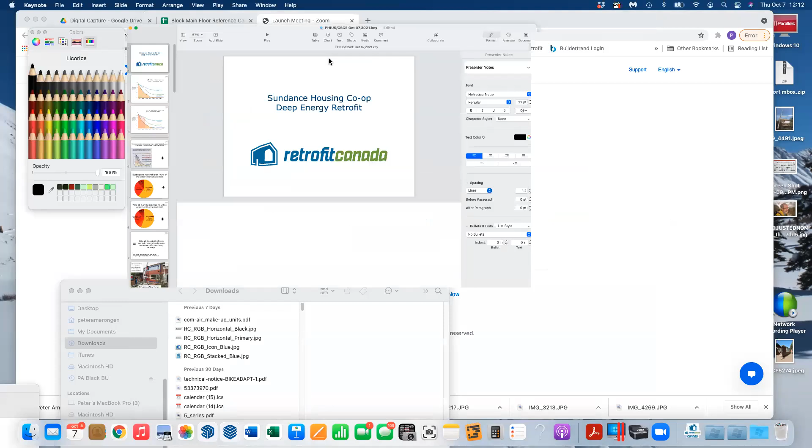And with that, I will pass it over to Peter. Is that okay? Can you see that? Yep, I see it. Thanks very much, Frank.

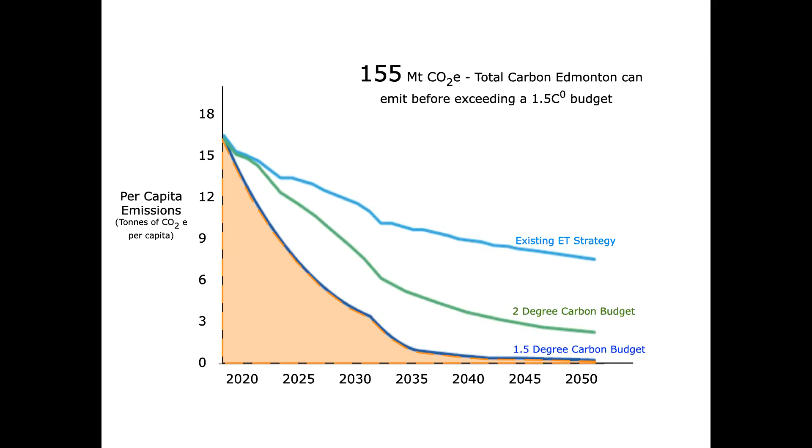Before we get into the presentation itself, I'd like to quickly go through the context. As Frank mentioned, I'm on the city's Energy Transition Advisory Committee. This slide shows the kind of cuts we need to make to keep Edmonton within a 1.5 degree scenario budget. At the rate we're going, we'll blow through that in the next 8 years.

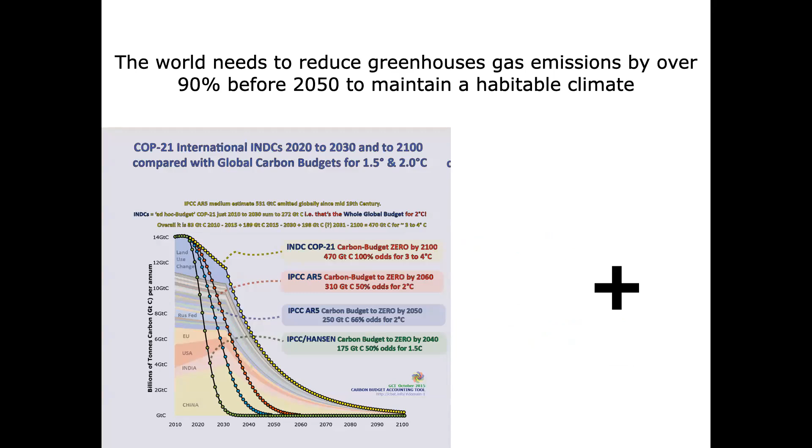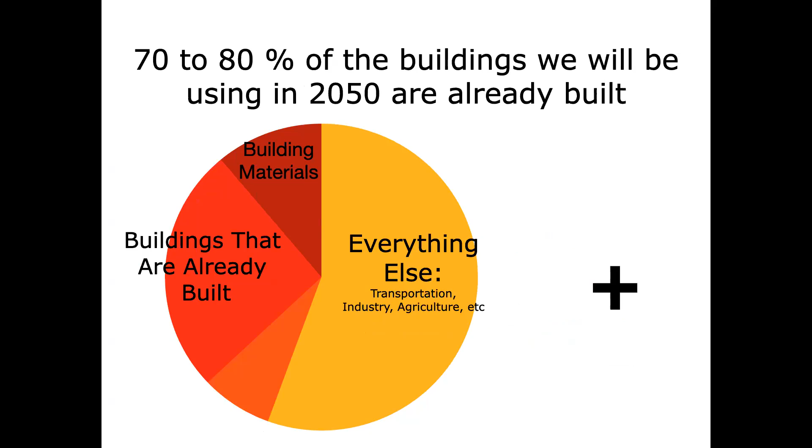And Edmonton is not atypical—we're seeing graphs like this all over the world. Buildings are responsible for about 40% of total GHGs, and 70 to 80% of the buildings we'll be using in 2050 are already built. So there's really no path to a stable climate without industrial scale deep energy retrofits to existing buildings.

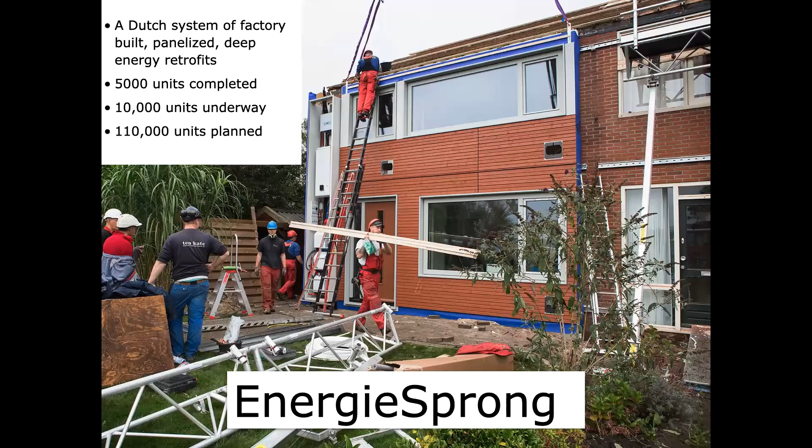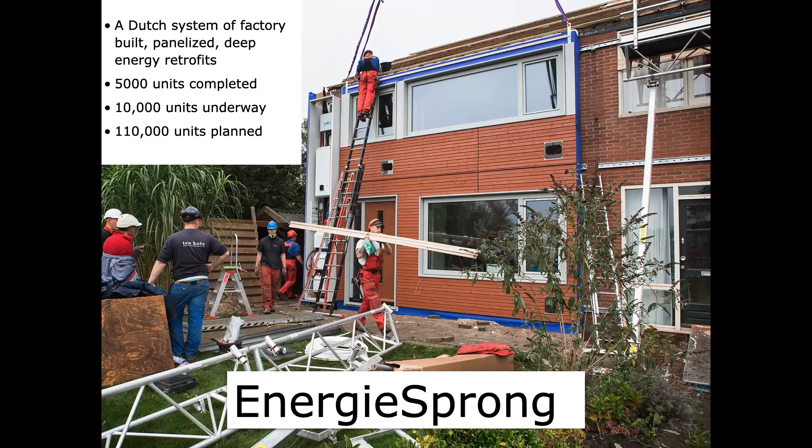The Dutch have an interesting start on tackling this problem. They've developed a system called EnergieSprong, where they scan existing buildings and make panels in a factory, bring them out, and within a month or so transform existing 1950s post-war buildings into net zero energy buildings. They've done about 5,000, have about 10,000 in the works right now, and they have 110,000 planned.

The Sundance Co-op was built in the 1970s. They were on the verge of renewing their mortgage and their lease, and they realized this would probably be the only chance they'd get to upgrade these buildings for the long haul. They're interested in the next 50, 100 years—it's a very stable community, and they're interested in leaving these buildings in good shape for posterity in every respect.

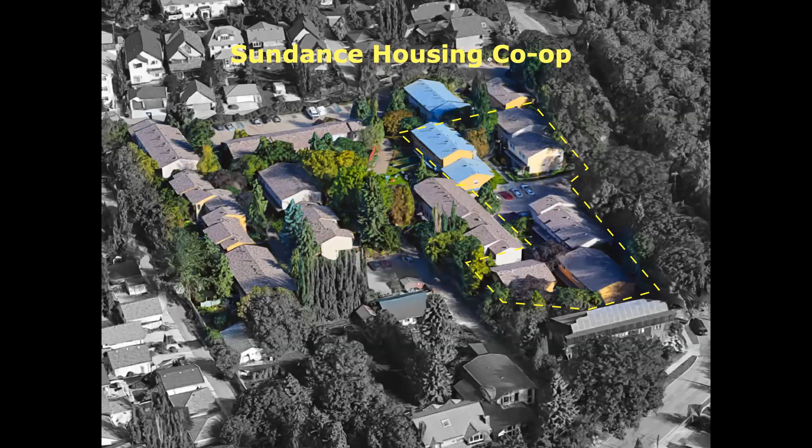We're now currently on building 6 out of 15. They started with a building condition assessment and found that the buildings are basically sound and worth upgrading. There's some maintenance backlog, but nothing serious.

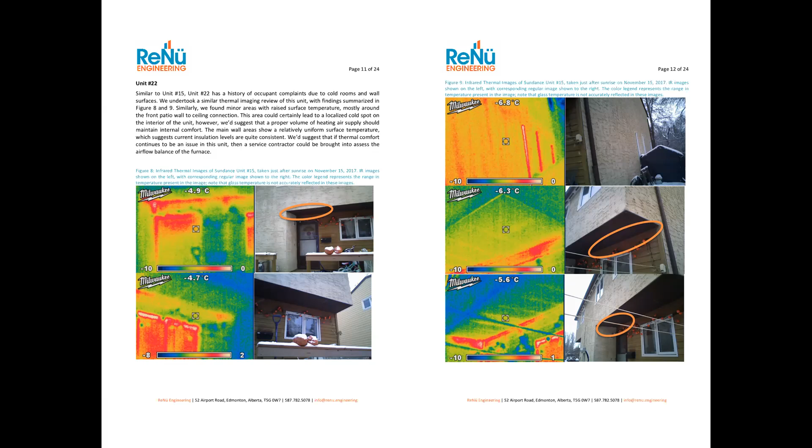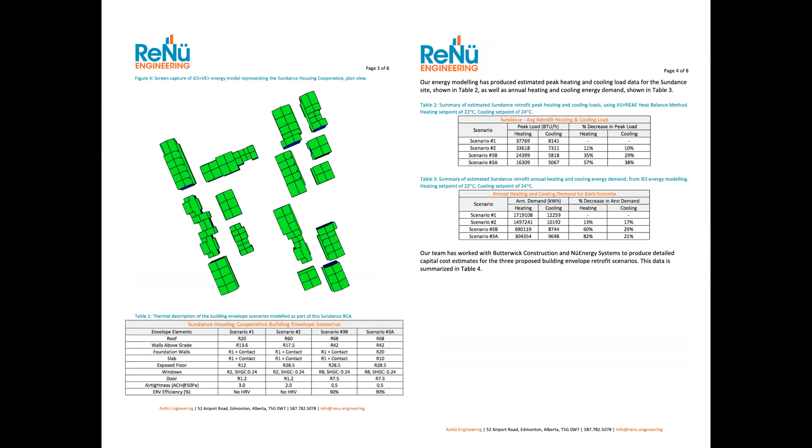So they had ReNü Engineering do an energy model and then combined it with cost estimates from Butterwick to present several scenarios. And the initial costing came in around $5.4 million and showed an approximate payback of about 30 years.

And while the co-op was thinking about that, we found out about an R&D program with NRCan and scrambled together and put a proposal in to do an EnergieSprong type retrofit to the co-op, and we were successful in that application. And the $2.5 million that came with it made the co-op's decision a whole lot easier. And I can tell you they're getting their money's worth.

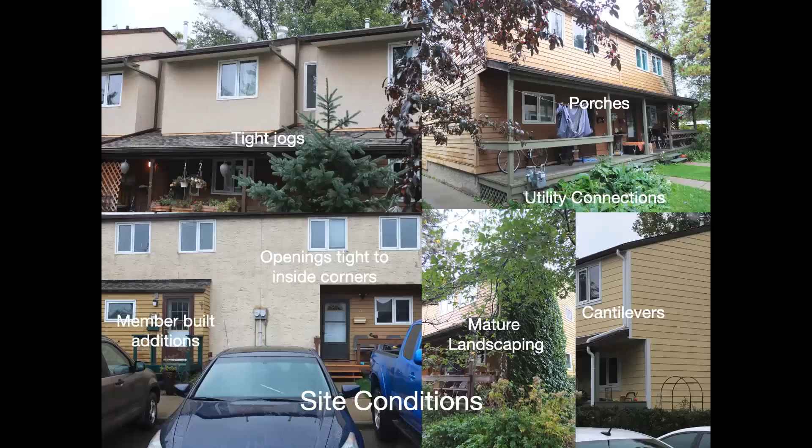We started with some pretty complex buildings, especially considering what they're doing in the Netherlands. I got a tour in 2019 of some EnergieSprong projects there, and I showed my tour guide these photos. I said, Simon, so what would you do with these cantilevers, these tight little jogs, doors that are too close to the corner to really have room for a panel, the porches, some anomalies from member-built additions, odd windows.

And Simon said, for us, this would be a no-go. So we kind of knew we had our work cut out for us. And we started in 2019 with a pilot on a duplex. We did that one essentially on site. We built panels in the parking lot and went through the motions as if they had been imported.

And we came away with a list of about 200 things that we thought we needed to improve, and some estimates as to the cost reductions that we would get from that. But it wasn't until we got in a few buildings that we realized the benefits of doing this one building at a time. The learning process has been ongoing and continuous. Each building gets a little bit better, a little bit faster. We're still not on schedule. It's taking us longer than we anticipated, but we're slowly catching up.

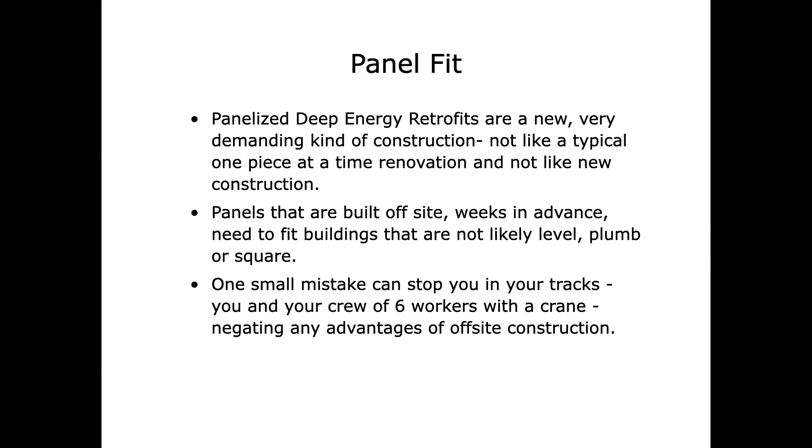So one of the critical things is panel fit. And one of the things we've learned is that this is kind of a new kind of construction. It's not like a typical renovation where you would just build to what's there. And it's not like new construction where you've got a set of plans and you build it kind of in the fresh air. The panels are built off-site weeks in advance, and they need to fit buildings that aren't level, not square, not plumb. And one small mistake can really stop you in your tracks and negate the advantages of off-site construction.

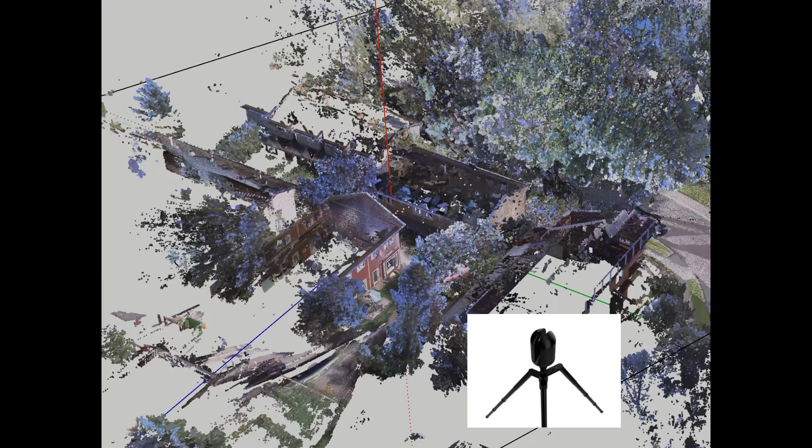So we started with a LiDAR capture. Bernie Jess, a surveyor, did the first building for us, and we could see we were able to make it work. So then he surveyed the whole site. It was 55 scans that are all registered together in one roughly 200 gigabyte file that was also calibrated to about 60 total station shots. So then he clips out each building and sends it to us as an E57 file.

We brought that into SketchUp using a program called Undet from Lithuania that enables us to extract the geometry one wall at a time as SketchUp geometry. And of course, because the buildings aren't level, square, or plumb, the extracted geometry isn't orthogonal. So we need to judiciously fudge that within the panel tolerances to get it orthogonal so we can work with it.

And then we apply SketchUp elements representing the windows and doors and slide them over the point cloud till we get what looks to be the best fit. And it's kind of a nerve-wracking process, and remarkably it requires a fair amount of judgment, which is not as magical as I had hoped it would be at this stage.

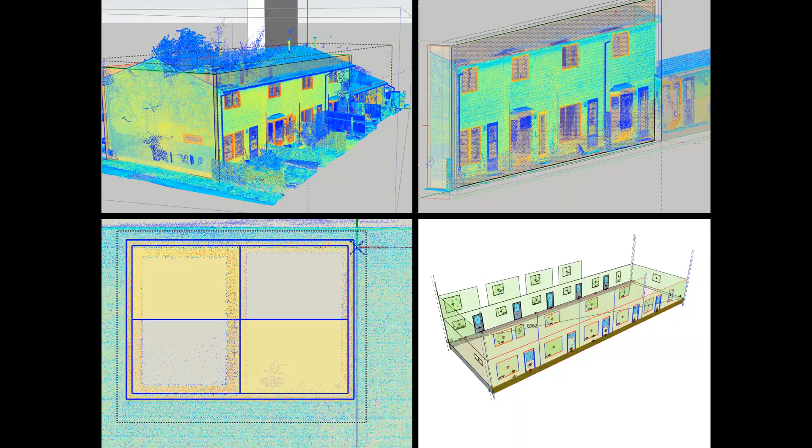Anyway, once we have the basic building geometry, we divide it into panels and then detail the panels for framing, for sheathing, including the lift points and cellulose fill holes and the water resistive barrier, and also what siding can go on and what needs to be left off to knit the panels together and get the cellulose into the cavity.

And it's an amazing number of drawings. Each building will have 20 to 30 drawings. We have about 20 pages of panel manufacturing details, another 20 of site details, and another 10 pages usually per building of site instructions.

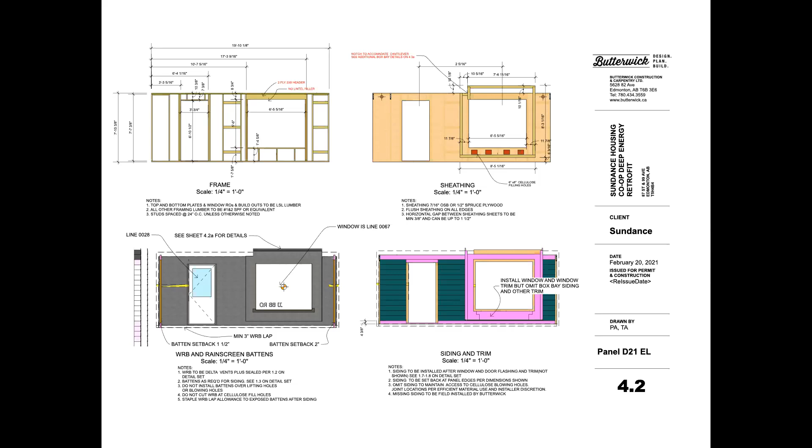So the basic panel is a lightly framed 2x4 panel, just enough material and strength to carry the siding and hold the insulation and withstand the wind loads and the stress of handling and transportation. They're made in a workshop offsite in Killam, Alberta, by our panel partners. They arrive with the doors, the WRB, the rain screen, and most of the siding installed.

We tried to find a local prefab plant, but nobody was interested. We're just a little too far off of their standard offering to make it worthwhile for them.

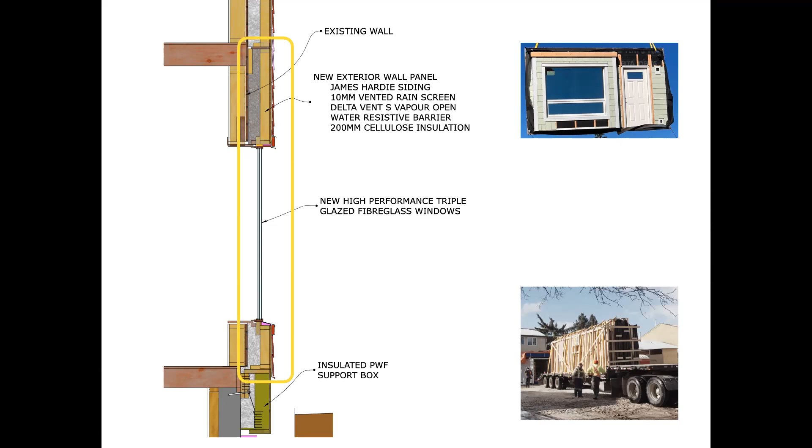So while the panels are being manufactured, we're getting the building ready. And we start with taking off the old porches, and we then use a hydrovac truck to excavate a slot basically around all the buildings so that we can install 6 inches of EPS insulation. And then we install a ledger and a panel support box that is hung off the ledger and designed to carry the panel load and the porches that go back on, and the roof, the additional roof overhang, and also the heat pumps that'll be going on. We'll see in a second.

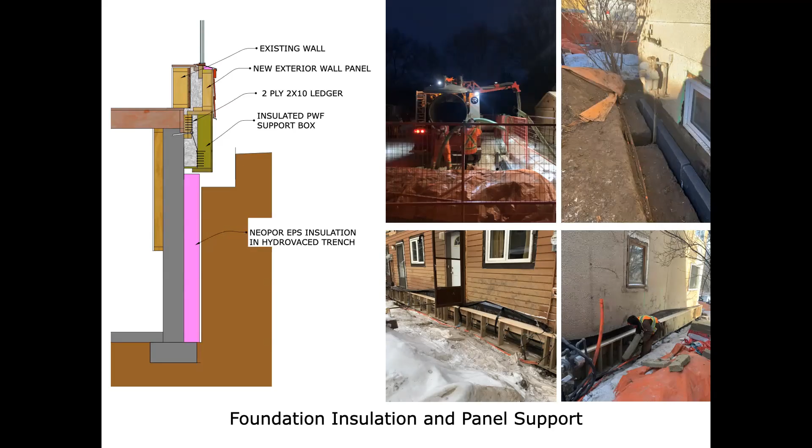So really, the building prep is where an awful lot of the work happens. We're slowly improving it. We're enlarging the basement windows to meet egress requirements so that folks can have bedrooms down there. And we've got a number of penetrations we need to make through the rim joist area that are for HRVs, the existing hose bibs, dryer vents, that kind of thing, that are durable and airtight.

And then in preparation for the panels, we loosen all the existing windows so that we can get them out quickly on panel day, and install brackets to tie them back to the building. And in many cases, some of the windows that were installed in the 2000s or 1990s, when they did the first window replacement, didn't get headers. And we're also installing some new windows. So we make provision for those on the outside.

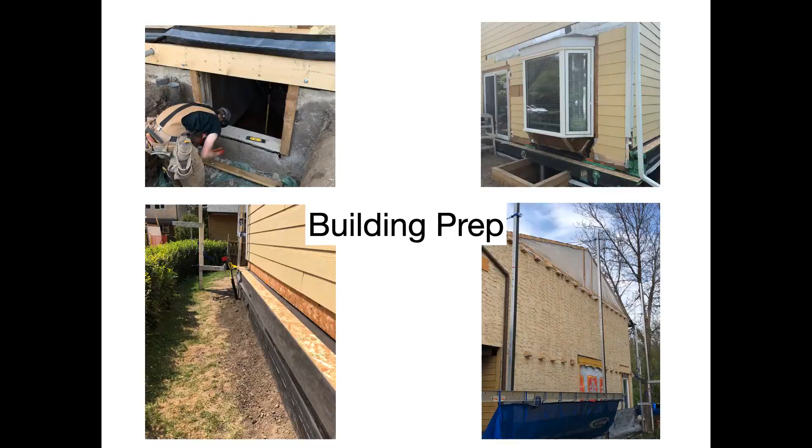So then comes the big day. Lots of anxiety about whether these things are going to fit or not. And so far, they've all fit really well. We shrunk them all about 10 millimeters in width on both ends, to allow us to slide the panels back and forth to get the best fit on the windows. We weren't allowed to shrink the windows by more than a few millimeters. The windows weren't any bigger than you would want.

In fact, if I were designing it, I would have made them bigger. So we really couldn't afford to shrink them. And so far we haven't used that 10 millimeters. We're just about bang on with them. So that's been a great affirmation of the process, and a huge relief.

So the end result is a building that's very similar to what we would spec for a new net zero energy building. Roughly, we're adding R50 to the attic, R28 to the walls, R28 to the basement walls. We're not doing the basement floor. It was too disruptive to be working in there to do that, and also too expensive on a cost per kilowatt hour per year saved basis.

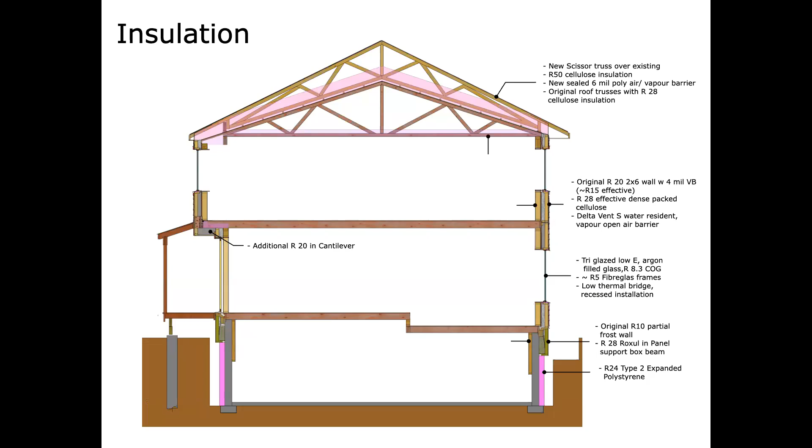The insulation gets blown into the cavity. It's cellulose. So a very low carbon solution. We've had some challenges with it and had to devise ways to essentially inject it way at the bottom to be able to get the pressure we need, and make sure that we design the air escape holes so that when we fill in underneath the windows we get it right up into the corners. But all in all, it's working okay. From our bag count and everything, we're getting what we need in there.

Once the buildings are insulated, we knit together the water resistant barrier, which is also our air barrier. One of the big upsides in the retrofit is air tightness. The starting air leakage rate is about 3.5 to 4 air changes an hour, and we're getting it down in the 0.6 range. So it's probably one of the most cost-effective parts of the operation. And then the water-resistant barrier is behind a rain screen. So we start with a fiber cement siding, which is durable, and then make it even more durable with the rain screen approach.

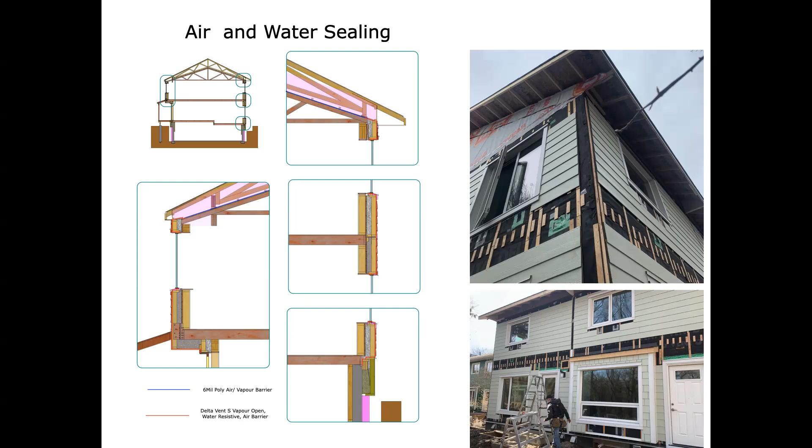For the roofs, we're wrapping the existing. We cut off the overhang, wrap the existing roof with a poly vapor barrier. The poly is getting enough insulation over it that it's well above the dew point, and that gets sealed together with the WRB on the walls. We've got sensors in our pilot that show that our moisture levels in the cavities in the old attic and the new attic are all well within safe ranges.

So we've also run into a bit of an issue with the siding. We really wanted to do as much as possible in the factory before these things came to site, but we're finding that the labor involved in patching in the remaining siding is almost the same as what it would be to do it all on site.

And when we combine the savings from the factory to not put it on, we're actually going to try on the next building to just install the panels with no siding and do it all on site, which has the advantage for us of being able to use a subcontractor, so our own forces can get on to the next building. But it's kind of an emotional setback in that it was part of the plan, and they look a lot cooler when they go up with the siding.

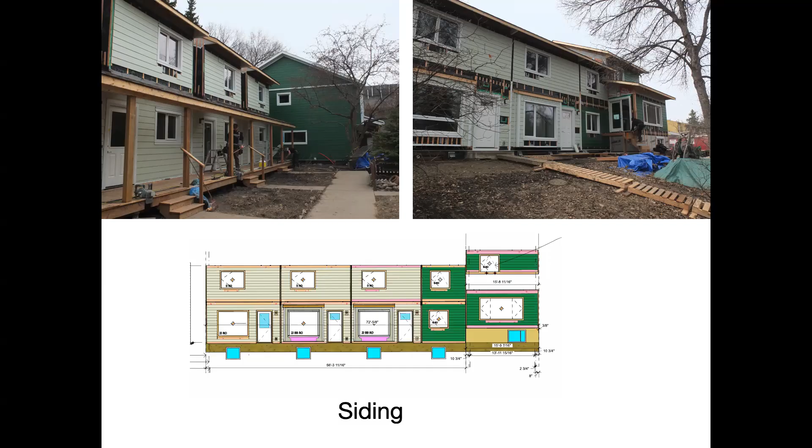Anyway, one of the other huge learnings for us has been the problems of working on a site with 100 people who are staying in their homes. And this is a community that's very democratic, really kind of empowered, and so we really work hard at managing expectations.

We start each building a couple of weeks ahead. We'll do a 50+ slide PowerPoint to let the residents know what to expect at each stage, who to talk to if there's a problem, and how we'll be scheduling it. Every week they get a week look ahead, and very often there will be updates in the middle of the week as well. So it's a lot of work. And inevitably issues arise.

The co-op has a group of just amazing volunteers that we work closely with, the Sundance Planning and Development Committee, and we just couldn't manage without their hard work and diligence in discussing and solving some of the issues that arise, and helping to keep folks informed and particularly dealing with the issues. It just would be impossible without them.

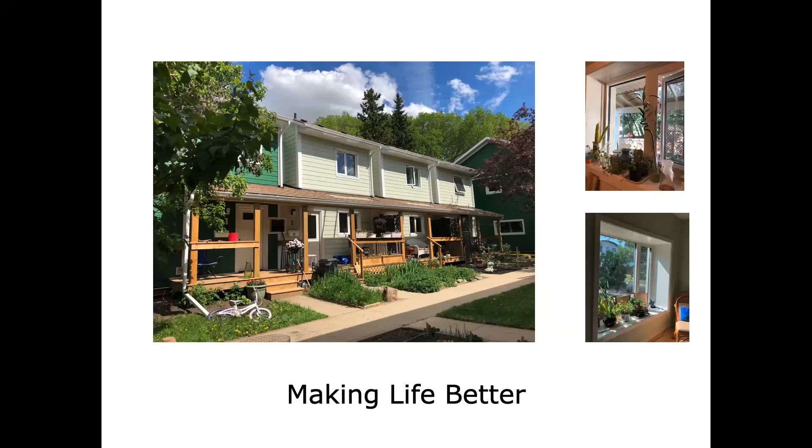So as part of it, because we've made the building so airtight, we needed to put in HRVs in every unit, and they're a critical component of health and getting that fresh air without paying a huge energy penalty.

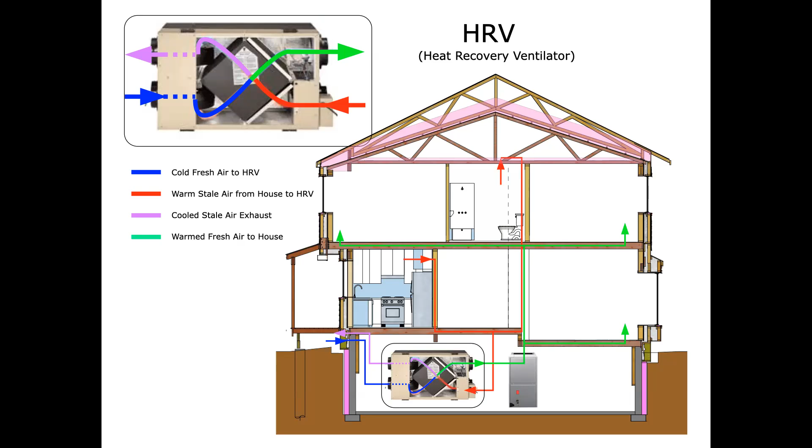There again, it's taken some learning to figure out how to install these things laparoscopically without too much drywall repair and disruption. We got kind of a lucky break in that we found that we could actually vent the second story bathrooms by running the exhaust line up through the old chimney, the old B-vent chase. We were able to just lift them out and drop these lines in. So we've got one hole now for the kitchen HRV, and way better than the pilot.

So we're also replacing all of the existing furnaces and hot water tanks, which are fired with gas, with air source heat pump heating and cooling units, and hot water tanks. Basically the same appliances that we would install in a new net zero energy house.

The heat pump heating systems are giving us a COP of about 2, two units of heat for every unit of electricity. On an annual basis, they fluctuate from a high of 4 in the shoulder season to when it gets to be minus 30, the COP drops below 1, so they're tied to an electric resistance backup heater that takes over at about minus 25. So when you do the average based on heating degree days, it comes out at around 2.

And the hot water heaters have a COP of about 1.8 on a seasonal basis. That's partly because they're stealing heat from the house in the winter to heat the water, so you've got to factor that in. In the summer, they give you a bit of free cooling, and all in all, it seems counterintuitive for this climate, but they work well, and they're a key part of the cycle. So abandoning the gas lines is going to save the co-op about $38,000 a year in fixed energy charges.

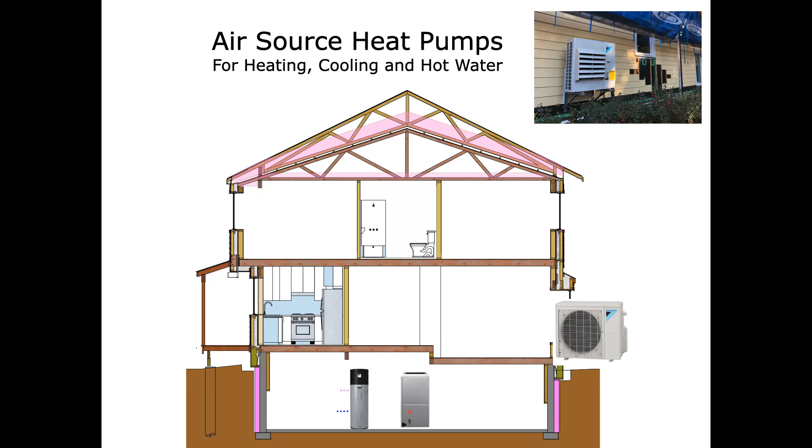So that in order to electrify, the original units had 60 amp service, and we need something like 120 amp service. The old system was considered obsolete by EPCOR and not upgradable.

So we installed a completely new system using directional drilling, a new 600 volt single or three-phase transformer with a series of 5 distribution sheds. One has the main switch and the meters in it, and then 4 remote sheds that each have 2 panels, serving about 8 units each, and that's where the voltage steps down to 120, 208.

So we had a big scare just before we were ready to start this. If we'd have gone with a single meter on that system, it would have put us in an industrial rate class that attracts a demand charge of about 48 cents a kilowatt hour. It's actually 90% of 48 cents a kilowatt hour year round based on the heaviest month, which would be the coldest day in January when we're using all electric resistance heating. It would have been prohibitive and wiped out any savings from all the conservation we're doing.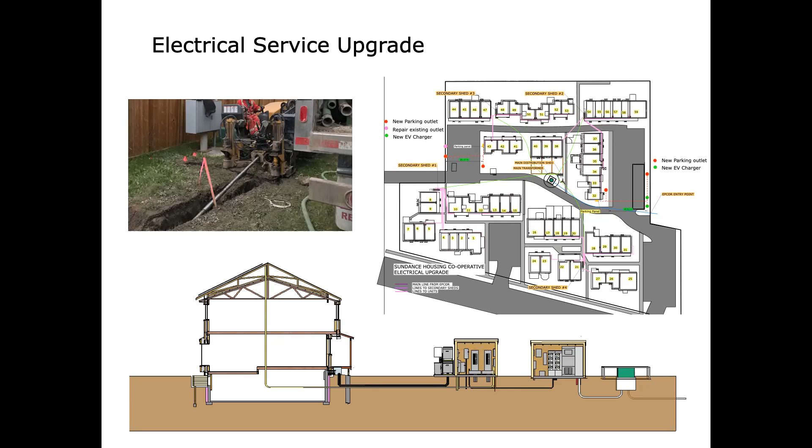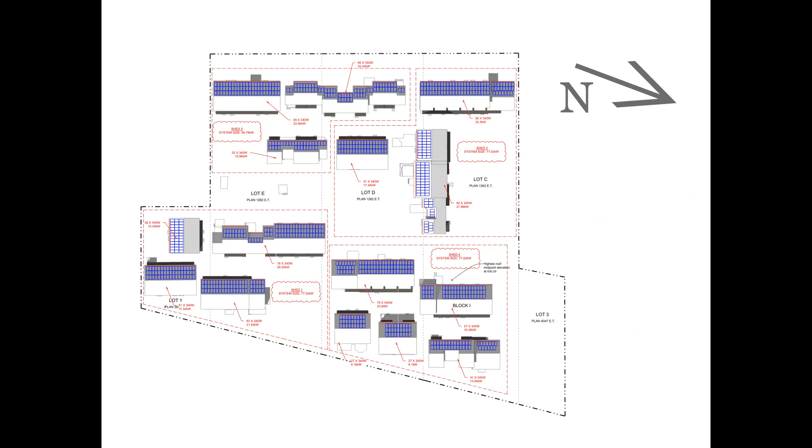So in addition, the co-op wanted to be as close to net zero as possible. So they're installing a 350 kilowatt solar array that will provide about 75% of the total annual energy needs, and then they'll buy the rest under an offsite renewable contract.

So the costs, it's costing about $125,000 a unit, which may sound high, but compared to what they're doing in the Netherlands and a comparable project in Ottawa, it's substantially lower. We had hoped that we would get it down to more like 80 or 90,000 with repetition, but at the end of the day, it's got a lot of site work and it's a renovation project first and foremost.

The panel costs are about 20% of that cost, and of that, half is the windows. So as we look ahead, we're anticipating further small wins, but it's unlikely that we're going to get it to where we wanted it.

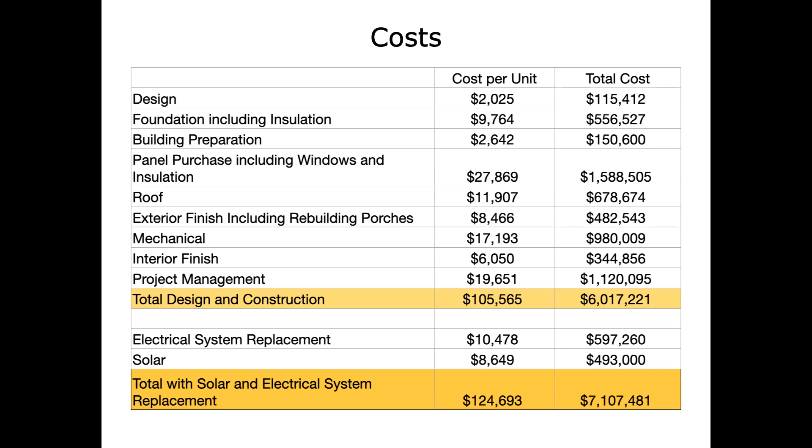So the total long-term cost of ownership will be low. So the value proposition is energy savings, maintenance catch-up, and avoidance, and some subsidy, I think, and to some degree, I think it's going to take a commitment to a more habitable planet.

The elephant in the room as we look at the landscape for doing this kind of work is really single family housing. In Canada, 8 million of our 14 million dwellings are single family houses, and the footprint from those is vastly bigger on a per capita basis than from multifamily. So we really need to crack this nut.

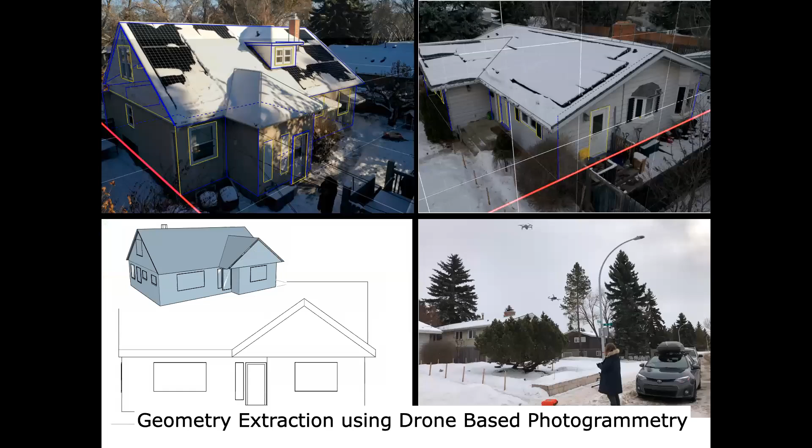But I think it's doable. We're excited about it, and we're particularly excited about a different way of doing the geometry extraction. We're working with a brilliant young grad student who spent some time in the gaming world, who's developed a program using photogrammetry based on drone-based photos.

He takes about 20 and uses about 10 of these photos from the drone. He can get optimal angles for the geometry resolution, and he stitches these photos together, much like you would a panoramic photo, into a 3D cloud of pixels, and then calibrates that cloud based on 3 dimensions on each of 2 sides, so a triangle.

And he's able to go to the far side of the building, where no measurements have been taken, and get about 6 millimeter accuracy. He's used least squares adjustment to rectify the geometry and make it orthogonal, so it saves a lot of fooling around for us.

And it's working well so far on this project.